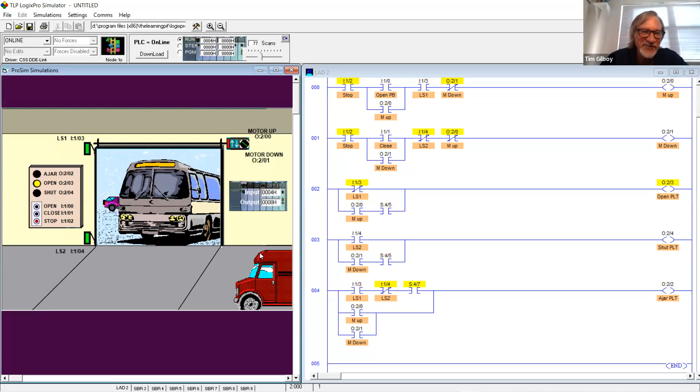All right, good. The next step is when we're closing, watch what's going to happen. I'm going to hit open. When you hit open, if it's closing, it should stop. But I'm locked out. You see that? It's not letting me do anything. Everybody see that? Yep. Okay. Because we've interlocked them. You can't do anything because I've interlocked them here, which is still the way you want to go. You don't want to do it any other way.

I'm going to go out of the run mode here and get back to programming. The next step is for you guys to go ahead and when this is opening or when it's closing, it doesn't matter which direction. If it's opening, when you hit the close button once, the thing stops and does not move forward again. Then when you hit close a second time, it starts to close. Or if you hit open, it'll open.

So the first signal is opposite of what you're doing. So if you're opening, you hit close, the door should stop. Then you can either open or close from there. Or if you're closing, you hit open, the door should stop, and then it doesn't matter which direction you want to go. All that does is stop the door so you can go in another direction if you want.

How would you think you would do this? Somebody give me an idea of how to do this. It's going to be our opposite. Instead of examine if closed, you're going to use an examine if open. Kind of opposite logic. Somewhat, but what are we going to do? Let's just say I'm opening. Okay. I hit the close button. How would I put that in the program?

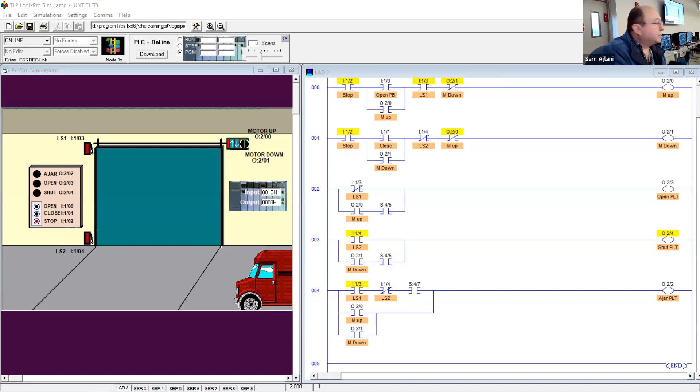Are you showing that on the screen? What are you sharing? You see it right now? Right now what you're sharing, Sam, is... Okay, it's not letting me do that. That's the problem with this. I can't share my desktop. I can only share a piece. So let me stop sharing here. And I will share that and see if I can figure it out here. Let me try this.

Okay, all right. So right now here, it says utilization of binary or integer table bits to flag a condition. That's how I want you to do this program. This is what I tell my students. I do not allow them to use OTs in this one. I use those somewhere else, but because they're very complicated to use in bit logic and can get you very, very messed up if you're not careful with them.

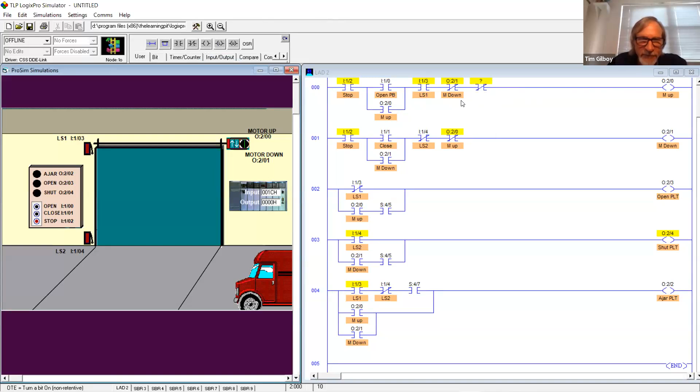So we're going to utilize the binary bits, B3s. We're going to flag conditions because I'm going to show you what's going to happen here if you don't do it. Let's just assume that I'm going to put something in here to stop this line. What would I use to stop this line in here? Well, if I'm going closed, open, and I want to stop this, I would put the closed bit in here, right? Does that make sense? Okay, I'm going to put it as not as open so I can run this until I'm ready to hit the close button, right?

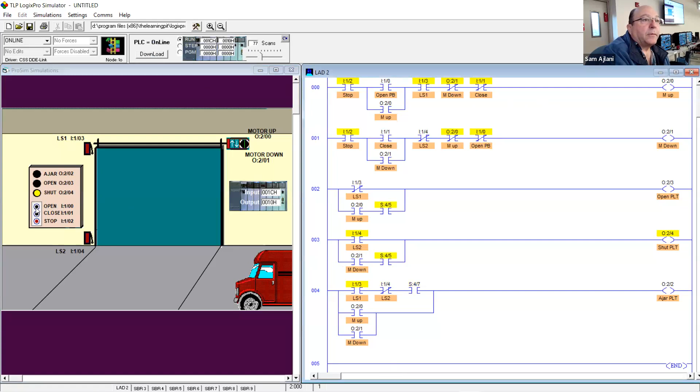Same on the one down here. I would want to try this and put the open button down here. It's open PB down here. And I'm thinking when I go through this, it's going to stop it. Students will do this all the time. And it's not going to work right. I'm going to show you. I'm going to open. Speed it up just a hair. Now I hit the closed. What happened?

What happened when I hit closed? It just reversed it. It didn't stop and halt like it said. Because when I hit close here, I'm also hitting closed here. When I hit close, since it knocked this out, this line is now active and it immediately jumps going down the other way. So you cannot use these two bits to do this. You have to flag the conditions. That's what your binaries are for. They're outputs so you can run internal relays.

Oh, come on. Or you can set up a flag condition to flag something. So what I'm going to do is, and it's been a while since I've done this one, I'm going to flip over and I'm going to say, if I am moving in the up position, which is this one, right? Everybody got it? And I hit the close button. Where's my close? I'm going to trigger a bit.

And if I open my data table up here, remember the little tools are your data tables. And I will go to the binary. I'll just grab the very first bit. They can be outputs and inputs. So this is now a flag condition where I'm saying I'm moving up and I want to close and go down. So what I'm going to do is I'm going to latch that on.

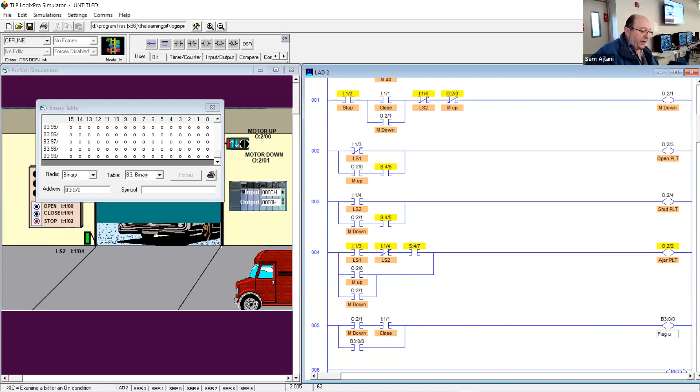I don't generally put a lot of information on this, but just so you guys know, this would be like flag up. I'm moving up. And I don't normally do it this way. What I usually do, which we're going to do next here in a few minutes, is rung comments, which is what I'm going to show you I do with my students in the next little exercise we're going to do before we get out of here.

And this is flagging that I am moving up. Wrong one. Damn it. All right, let me get this one up here. Right here. It's supposed to be moving up and I hit the close button. I've locked this bit on. Okay.

Now what I can do is I can bring this bit right here and lock it in right over here. And say if that bit is not on, I'm continuing to move. But if it comes on, I'm going to halt this puppy. Everybody see that? Is that the first bit we put in here? We didn't do that last time, did we? Did we use flag data yet last time?

We did in something else. Actually, see, remember we did a control relay, and instead of wiring a control relay, we just made a B3 to do that with. Yeah, that was, yes. Where was that? That was back in the first class we were in. Very first class we were in. We didn't use it this last lecture thing we did online. And in the class, we did that. What the B3s are, they're internal relays, so you don't have to go out and wire another relay.

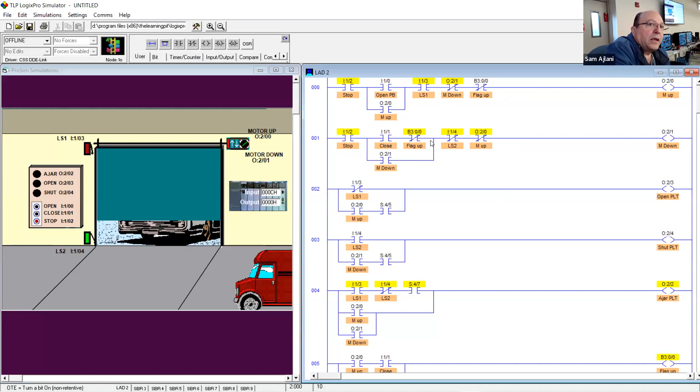I can put it here. I could put it down here. I mean, when I hit close, I don't want it to go. I can do it here so it blocks it. But even if I hit close, it's going to start to jump down. I don't want this to come on at all. So I can put it in here. I could put it somewhere else, but this is the point where I usually put them if I'm going to do them. Now let me download that and let's try it again.

Oh, I got the flag on. Sorry, hang on. I got to get in there and clear the flag. I didn't clear the flag when I was in there earlier. So let me drop down here. You can see it. All right. Now I'm back to normal. Let me open. What did you just do? What do you mean by clear the flag? I just made it when I locked it in a minute ago. This is still locked in. I have not reset this yet.

Okay, got it. So what I did is I just got this triggered going in, and now you notice that when I hit close, it stopped the opening. Everybody see that? Kind of hard to see because this thing is really hard to see through. But what I did was I flagged that condition. How I flagged that condition was I said, if the motor's going up and I hit the close button, I'm locking this flag in. Knowing that I'm going up, I'm going to stop the upside. And how I did that was I blocked it here. But I don't want to go back closed again, so I got to block it here as well, right?

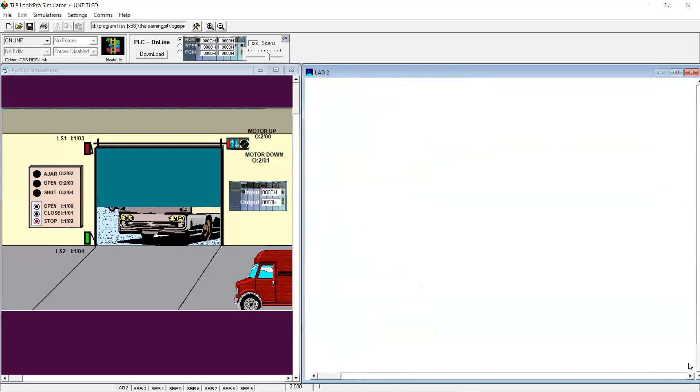Now you were saying that could go anywhere. So just because that's going to read that, it's not going to matter because it's not going to have happened. So you could put it as the last input, right? And it still work. Probably. I do it inside here. Why? Simpler reason I do it inside here is I don't want the close button having anything to do. So it's all about the close button. Gotcha. Just for simplicity for the students, I kind of do it there. But yeah, you could put it next to the stop or out between the LS2.

Yours is better. Yours is using logic. They're together. So that's good. Same thing. Right. So I know that that's going to happen. I got it. Now the issue is I got to go the other direction. How the heck am I going to get that unblocked?

You got to flag another condition. Yeah, you could force it, but well, no, remember, I got to hit close again in order to move it down, right? Yeah, so I can create a second flag condition. When we're talking about flag conditions, we're flagging a situation in the process. We were motioning up, right? Yep. And what we did was we said, I want to flag that I'm moving up, and I hit that close, and then I blocked everything from happening with that flag.

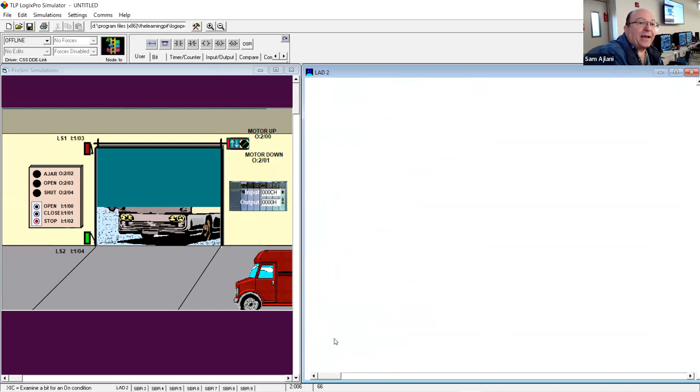So what's my new condition now? Want to move down. Okay. And so you got to find when this is on, right? When I am in this flag condition, right? That means my flag up is on. Yep. And I hit close again.

Now you got to be careful with this because you're going to have to do some real manipulation. This may not work because now I'm going to clear it immediately when I hit close. So the first time I hit close, it's going to lock it down. But if I'm in this condition and I'm still pressing that close, it's going to flip on you, right? So can I really do it that way? Yeah, you could do it that way, but I don't think it's dependable.

Why? Well, I was thinking about the way this program is being processed. It depends on it stepping through. So therefore, depending on where the program is processing, I think it could make it confusing. It is confusing. This is a hard concept for students to pick up. Yeah, me too. Exactly. That's why I like the simulation software. It gives you these scenarios. One of the key things about this particular program you want the students to get out is interlocking with the motors, right? And learning how to use the flags. That's the key behind this program. All right.

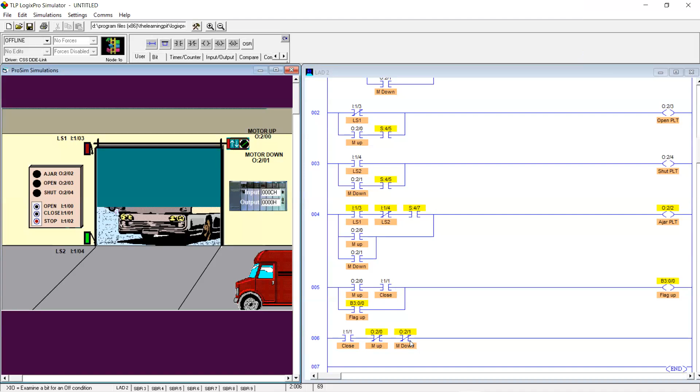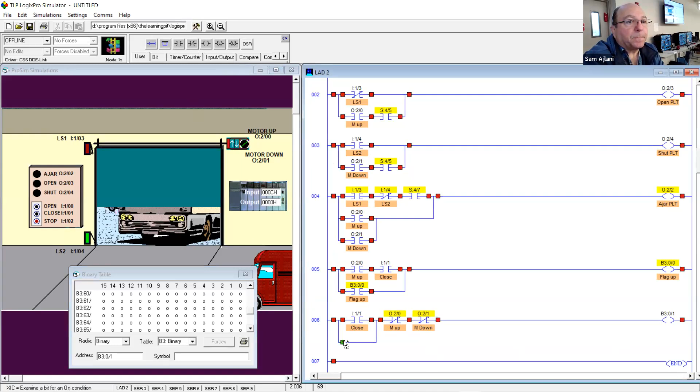Okay. This is my other condition. The first one I was in motion. I hit close. Guess what happened? Got it. All right. Now I'm moving this way, right? Yeah. And I hit close and I don't have anything going on. What can I do? I can put another bit on, right? Flag that condition. Oh, where in the heck am I here? Okay. All of this happening. And I don't really necessarily need this inside a loop, but this one could be in the loop. Right? Now I can break this one once that one's done.

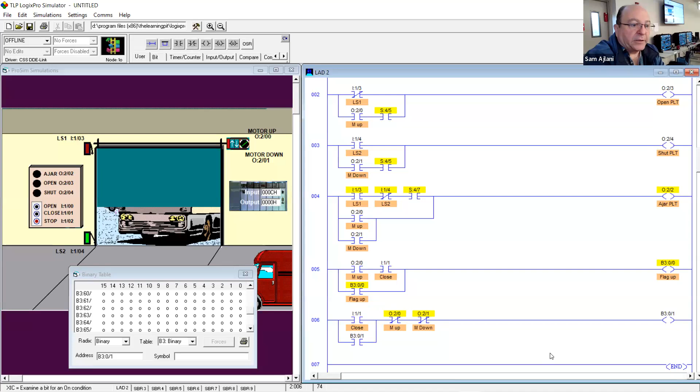Oops. Somebody else coming in, or did somebody get knocked out? Might be coming back in. Oh, okay. Poor thing. She's having trouble, isn't she? I came to campus because my internet at the house is terrible. What I'm trying to do is put you on one computer so that I can follow on my own software while I can listen to you over here. Oh, I got it. I don't know if that's gonna work. Well, wait a minute. You can run them both at once. Start the other one and use Alt Tab to go between the windows. That is true, but she wants to see it live while she's programming it. Okay. Yes, and our screen is small. Yeah, that's a double monitor. That's my problem.

Right. So I flagged this condition. I don't know if this will work or not yet, but we could play with this. What I can do is I can break this one so I can go down now, right?

You think it'll work, or do we need to do something else? Let's try it. All right, we're gonna try it. I like Sam's method here. That's what I try to get my students to do. Just try it. Play with it, work with it. It's how you learn.

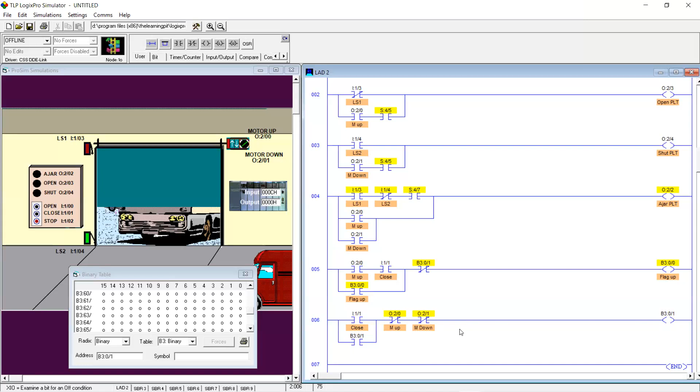Okay. This is just the closed portion here, okay? Right now, you chose another bit, right? The other one was 0 bit. B3-1. I flagged the new condition. Yeah, good. I see it. It is different. It's probably not going to work because there's a couple more things we got to do, but I'm going to download and get rid of this.

Now I'm going to go ahead and open again. Oh, I got to clear that bit. Sorry. I hit close. It should clear it, I think, if I did it right. Yep. It's closed. Everything is off. I should be good. Okay. Let me put it in run then. Okay. Let's open.

Oh, is the bit still locked on? It sure is. Let me clear the bit. Sorry about that. Keep forgetting. I should have a clear bit symbol in there, but I didn't do it. When you get off, whatever was on there last is going to be downloaded with these bits. So sometimes I'll put a push button in there to clear bits. And we can show you how to do that later. But right now I'm going to open.

It closed. What happened? Went straight to close. Right, because it looped, right? Interesting, huh? So when I close and I'm holding this button down, I am now what? In this mode, right? But I'm also holding the button down here. So what if I hit this close? This is going to be maintained.

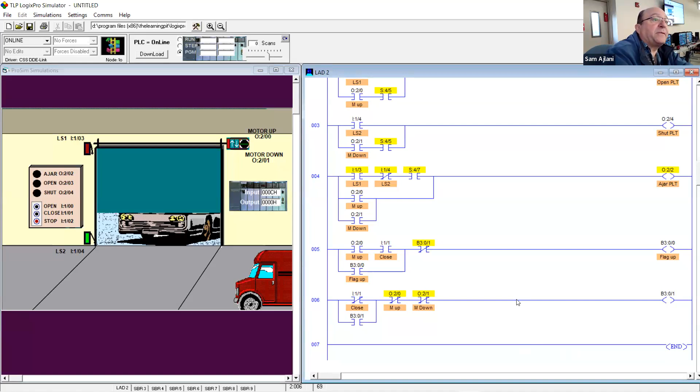That make any sense to anybody? Yeah, a little bit. All right, let's try it and see if it works. There's more to this, but so let's open. Close. Now I'm going to hit close. Everybody see that? Everybody understand what happened there? Watch here. Close. Right, it stopped, and then when I hit close, it closed, right? Because when I push the button in, I'm locking this on, which is going to block up there, right? Y'all saw that, right?

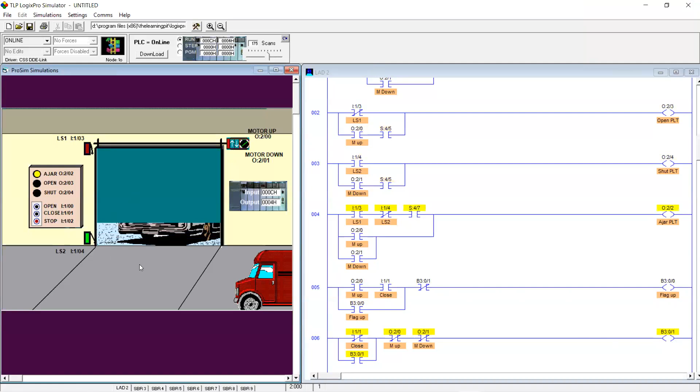When I release the close, guess what's going to happen? Bit 3. And that's going to stop this. So the second time I hit the close, guess what's going to happen? Watch one more time. I hit close, I hit this, which stopped up there. When I released it, this came on and cleared this bit. Now, if I hit close the second time, I'm ready to go again if I want to.

I set up 2 flag conditions. Flag 1 is if I'm moving and I hit the other button, I'm flagging it. And that's going to block what? Whatever direction I'm going. So it's not necessarily flag up. I just put flag up so you can see where we're going. The second one is reset the flag. So I don't need any more bits because, depending on which condition I'm in, moving up or moving down, I can use these 2 to do everything.

All I did was I closed, this became active, this came on. The minute I release this and everything is stopped, this went on and cleared it so I could go down. This is the difficulty of logic and logic gates. This is where students get bogged down right here. Yeah, totally agree.

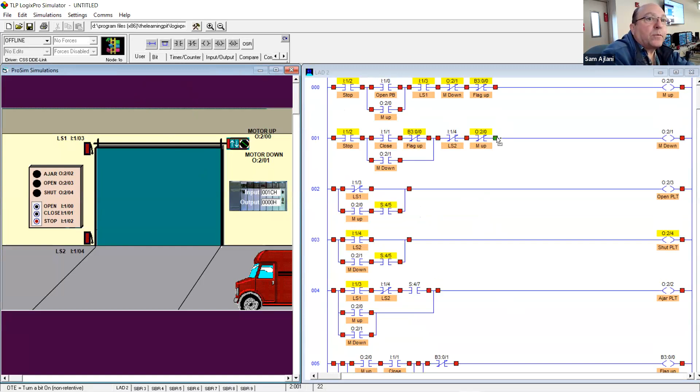It'll still work the same way, and I have to go up top here like I did with the other one. See how I flag the condition here? I got to put the same flag here, and I got to put the same flag here. And that will solve the problem for you. Except I'm going to change the name of it. I'm just going to call it flag motion or whatever. Or you call it motion flag, whatever you want to do.

And then this one I would just call reset. That way I can reset that motion. So reset motion flag.

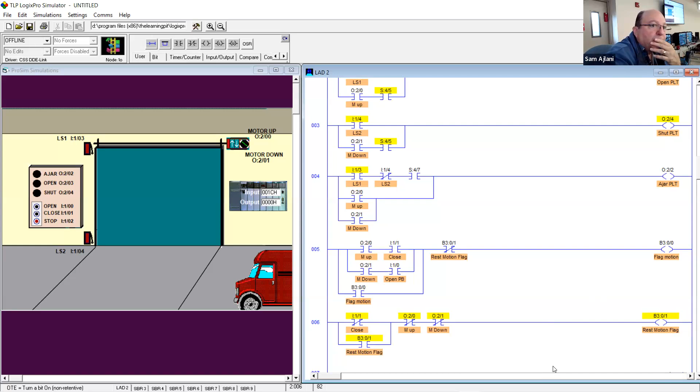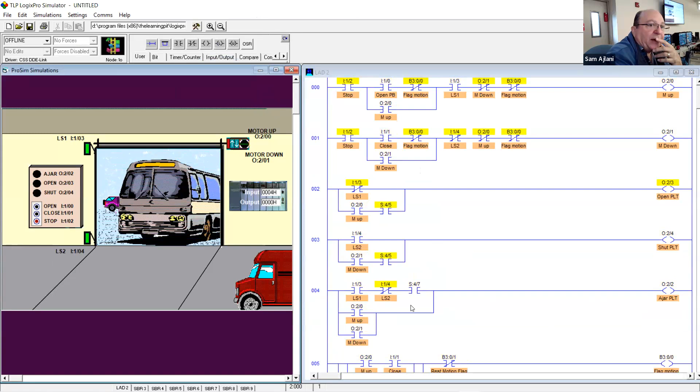Let's try it. Let's play with it a little bit. All right, I'm going to open. Things not moving as fast as I'd like. I think my computer's... it closed. It closed. Now I'm going to hit open. What happened? What did I not do? All right, do it again. Now I didn't reset it because I failed to put my open button down here.

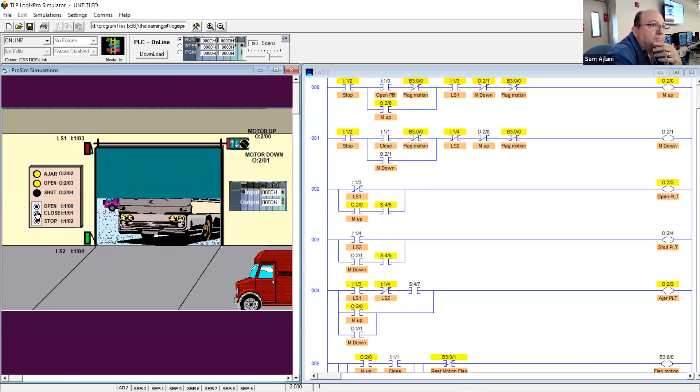This is the two hardest things in this whole project. But it's critical that your students understand how bit logic works. This is very important on flagging conditions. These two lines control that door pretty heavily. All it's controlling is, am I in motion or am I not in motion?

Think about it. If I'm running and I hit one or the other, I'm locking this flag on. As long as I'm holding that button down, it's locked on. The minute I release, now I'm ready to go back the other way. I clear this, so the second time I hit it, it will allow me to move in the correct direction. Very difficult concepts to understand.

Believe me, when I first started programming, of course, I was on the old handheld teach pendant thing where you only get to see one line at a time. You had to write all your programs out. What a nightmare that was. Then when they moved to DOS, I thought I was king of the world because in the DOS version, I could see more rungs. And then now they got into Windows, it's really good.

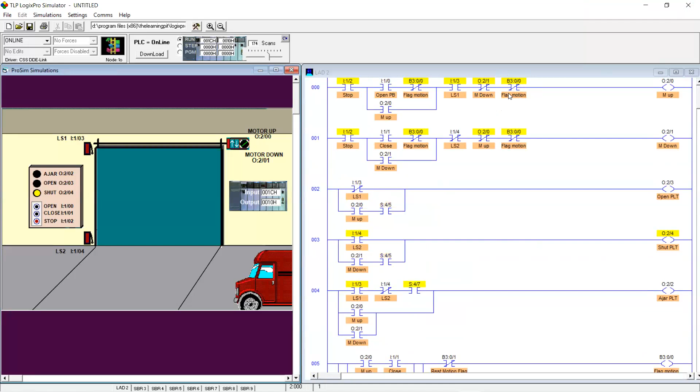This bit is locked on. B3:0/0, okay. Do you see that? Yes. Yep. Right here, it's going to stop that motion. Okay. See it right up over here? Yep. The minute I release that, what comes on?

Okay. And that's what's going to reset this. If this is on, this cannot be on. Okay. So now I'm ready to go in either direction because I'm back to this situation where this is no longer blocking anything. But I'm not pushing it to engage it, right? Right. Okay. Now I push it the second time.

This will go off, but it has no impact. The only thing this impacts is this, because now these are back on. So if I push open or close, it's going to go in either direction because this is no longer engaged here or here. Okay. I don't know if I necessarily need this here. I mean, I can take this out technically. It should work the same way, right?

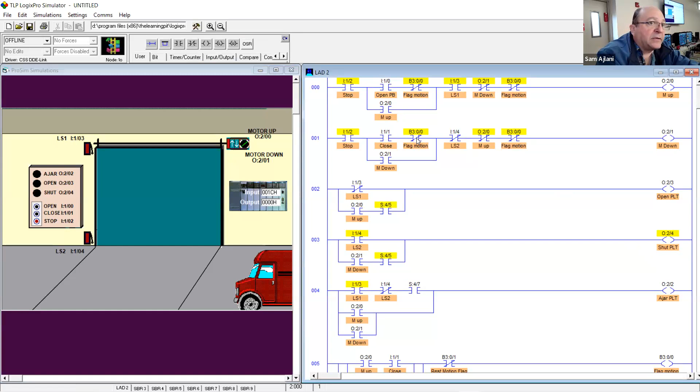I do this sometimes because I'll do it here so they can't push the button, but I need to stop the line. So I don't really care about this one too much. Let me download it and show you that it still probably will work without it. Okay. So that was just kind of obsolete. I threw it in there just to show you that I'm trying to block the signal, but this is what's blocking you from moving right here.

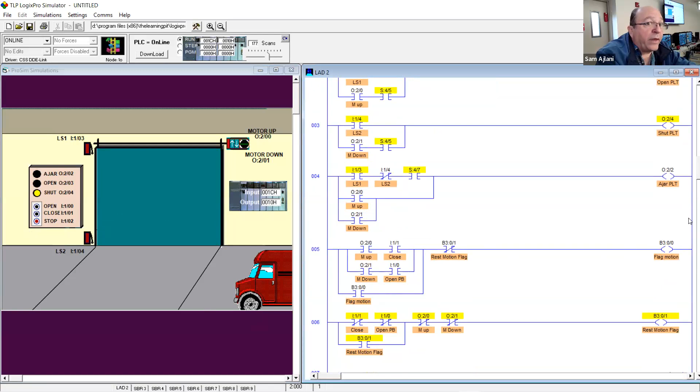Got it. Yeah. And so all I'm doing is I'm flagging a condition. I am moving down and I hit the open button and that's going to stop. Because if I just use the open button up there without any flags, and this is not here, the minute I'm closing and I hit open, it's going to immediately jump up. It's not going to allow us to stop it. It's just going to go down and start moving right back up. I don't get that stop motion. So I have to flag that condition to stop it.

It takes students a while to get through this one. And the last one, as I said earlier, before the rest of you guys came in, me and Sam were talking. I told him, Sam, I only ask for exercise 4. I don't have time to grade each individual one. And the reason I don't ask for the others, well, what if they're doing something wrong? If they can't get it, they're going to come to me on exercise 1, 2, or 3 and say, hey, I can't figure this out. Then I'll sit down with each one of them and work with them.

But most of them, the first 3 are pretty basic and they should be able to get it to work. And in my lecture, if they say, hey, I wasn't able to get this, then I'll go over it and show them how to move up, lock it on, interlock it, whatever. The flag, I make them play with it until they just get so frustrated they can't figure it out. And then I say, okay, it's due today, and none of you've turned it in because you can't figure this out. So let's talk about this. I'll get them started on it before the end of the class. I don't do it for them. They have to do it. Once they see it, they got it.

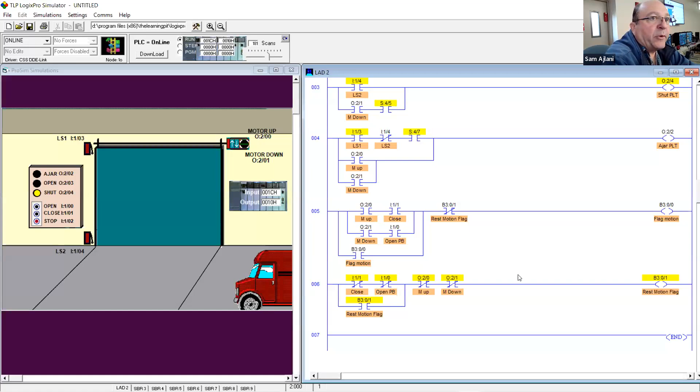Start, stop a motor, and then turn a light on when the motor's running, go red when the motor's running, and green. I'm doing all kinds of stuff like that through a PLC, and they're gonna get freaked out because they've been in motor controls wiring all these hairy start, stops, taking them 30, 40 minutes to wire one, and they can program it in a matter of minutes and wire it up. That's when they start throwing rocks at me. Why didn't you show me this before? I told them that's going to happen, but we have to know how we got here.

So this is about week 6, 7, somewhere around there. Maybe I have to go back and look at my course. Do you have a prerequisite for your PLC one then? No, I have a co-requisite. They have to have taken or be taking motor controls with PLC. I prefer they do both because here's the reason why. They're young. They have not been exposed to relay ladder logic. And if I get an old man in here like me who grew up with relay ladder logic, it's near impossible to get them over to PLC ladder logic.

They're thinking these symbols are normally open, normally closed, and that shouldn't be working like that. I should have a normally closed, examine if open as my stop. No, that's not true. And I had one guy who worked for General Motors say, that's how we program those. I said, I guarantee you it is not. That's illegal. If OSHA found out they're gonna shut that plant down. And he's going, no way. I said, go look at the program. Have one of your techs open it up and show you how you did it. It took me almost 2 semesters to get that guy to realize I was right. He just could not get it because he's old school relay.

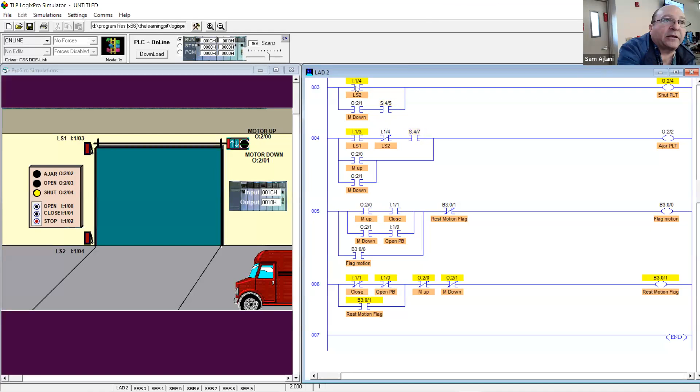And that was my frustration. I just think backwards now, it's literally when you're looking at the contactor. For guys like me and you, and probably Sam, I imagine he's the same way. Yeah, I am. Because we're all relay guys. We grew up with relay. PLC came on board while we were working. The problem is we have to go opposite. Just think it's opposite of what relay is. Exactly. So look at these symbols as in the normal condition. What condition is the examine if closed here? That's in the normally open position. All this is saying is it's open and I'm waiting for it to close. Examine. I drive home the examine.

But I still have people like Automation Direct that call it a normally open contact. I'm saying that's not right. Nobody else does. I said, you guys are way off base here, because they're old school relay guys. Totally agree. I had to change. I finally switched to the right vocabulary. That was my frustration at the time, exactly that. I finally got my brain to go, okay, learn this logic. This is logic. Well, I catch myself periodically saying the same thing. Say that one more time.

Something else that's confusing about this is I use Amatrol's equipment to teach this course, and Amatrol has the EC90, which has a PLC on it. They also have the same portable unit without the PLC. Okay, the one without the PLC, you teach it purely from the relay standpoint. Yes. Then you got to go and take the same board and teach it from the PLC standpoint. And yeah, I see yours over there in the corner, right? Right. You got to teach it from the PLC standpoint.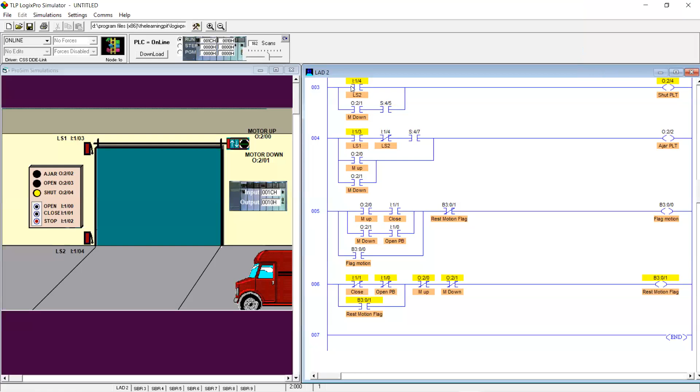So now you got to get them looking at the relay logic and saying, like that open relay right there, that's an XIC. Exactly. So if XIC, give me a 1 here. Right. So what I do is I have the 990 EC1 portable, strictly relay logic. And I bought extra banana clips and cut one end off to tie into a PLC, and I make them run it through the PLC. Oh, okay. I said, now program this with the PLC. And then they have to go back and see the difference.

Right. That's what I'm thinking of doing, is let them set it up on those 990s and then get a PLC with leads and banana clips, like you're saying, and plug into it to test those switches and run it from a PLC standpoint. Absolutely. And if you have a board like I do, these panels I got in here I bought from Grainger. You can get them from Grainger.

I make them wire the motor control circuits up, but then I make them go back and wire the PLC into the drive or into the motor starter. And I make them wire the overload back to the PLC, and they have to set that program up and build it and make it work just as if they had wired it using relay ladder. My second level PLC, there's no wiring of anything except the outputs. My inputs now are from the HMI. So it's all internal between the HMI. So my inputs are all B3s or B10s.

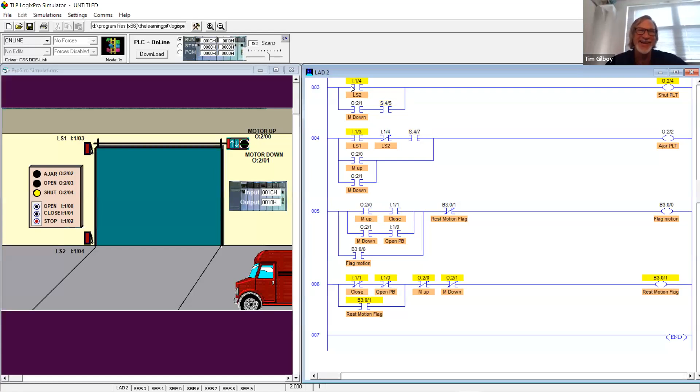I'm not an interior decorator, but I told them there are some good color code options. I give them to them from somewhere, because I have no business matching colors. But I see some really incredible screens come from those students. Some of them are pretty creative.

I can imagine. What you can do is take a bitmap, just take a picture of the panel they've been working on. If you switch from a panel to an HMI, take a picture of the panel, convert it to a bitmap, and it'll go into the background. Then you send your buttons to the back of that, and there's the button they were playing with on the screen. Because an operator does not know why he touches a button. He just has a pattern of things he does. So if you change that completely, he has no idea what the new pattern is. It takes him forever to learn.

So to eliminate that learning curve, you just take a picture of his panel that he's been working on for 20 years. You stick it on that HMI, and he follows that same pattern, and it works. Okay, that makes sense. Those are things they have to learn about converting from panel to there.

And for people who have some ADA issues, they got to be able to see that stuff. So if they're having a problem, they need to know right away. So I just make my stuff compliant from the beginning. Not that we're trying to be ADA compliant or anything, but since we work with students and we know how bad they can be sometimes, you got to do the same thing there. It's got to be visual, not necessarily sound wise, because it's very noisy in most plants, but visually it has to be there, flashing stuff and things.

So you're covering hearing impaired, and then verbiage has to pop up on the screen for your people who are deaf. So you got a lot of things you got to cover on those. So it's not just about building a simple screen to go. It's about how you build that screen. Second thing is they got to learn how to do multiple screens, because you want one for the operator, one for the supervisor that is coded. Nobody can get in but the supervisor. I'm talking like the production supervisor, so they can watch their shifts.

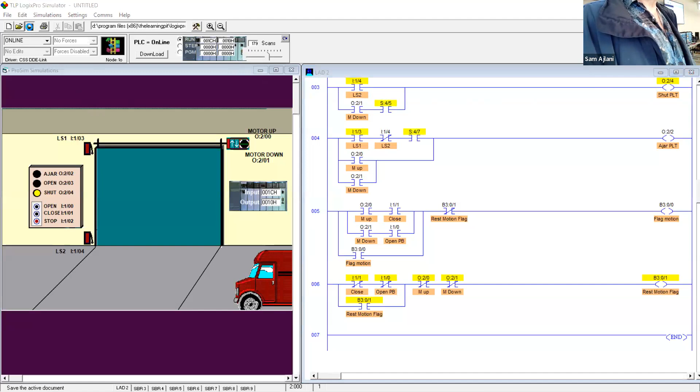So what I want to do is I want to stop here. I want to start a new screen. Save this too. If you haven't saved it, just save it. What I did was I did door project FLATE, but you could do just door project. And this was the original one we did. But I just went ahead and recopied it there, and then I just save it back as that. And then what you can do is create a solutions folder for all these things. So you have them here and you can go back and look and see. Oops, I'm in program mode.

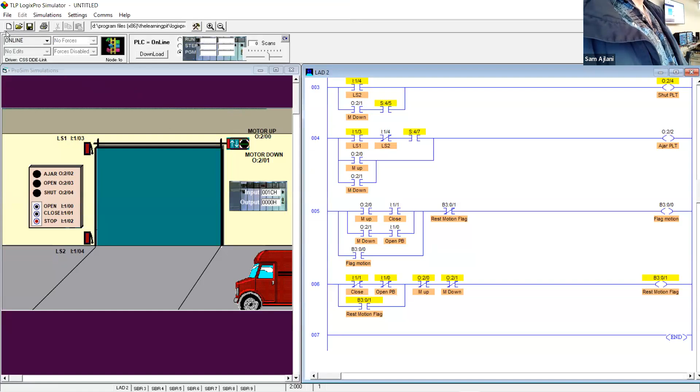So I'm going to tell you now. Can you send, you did something last time. I don't know what you did. If you posted it in our chat, I can't remember. I think you did it in chat. I did it in chat just a few minutes ago. If you go into the chat, you'll see it in there, the original one that we started with. Yeah, I had that one from last time. Yeah, and then that's the one I did. If you want me to send mine, I'll send you mine too. Yeah, of course I want your answers.

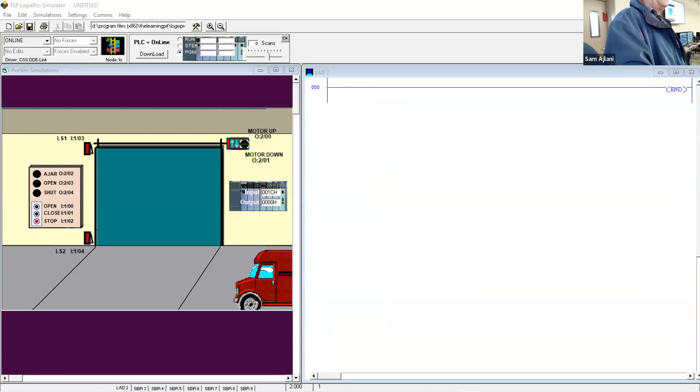Oh my God. You got your own answer. You completed this? No, I didn't. There's no way I could do both at the same time. Yeah, we're too busy. I gave up. My current one has like two things in it, and then I quit. All right, I just sent it to you. The second one is completed. It has more kilobytes. Thank you.

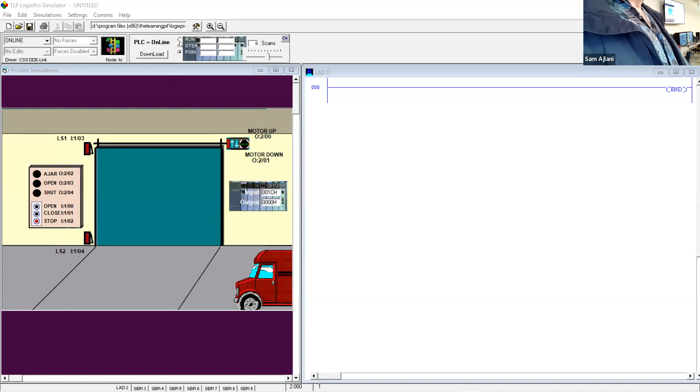I gotta play. The only way to learn this, just like when you teach this, is they gotta spend hours playing with this. You can't watch.

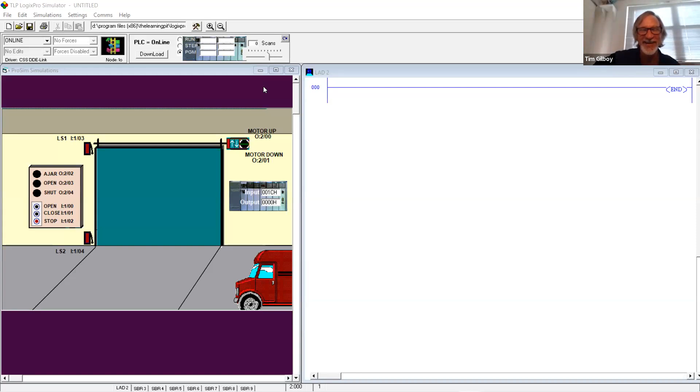This is why I Zoom every lecture I do, because I'm going over this stuff and I'm showing them how to do basic things. They go home and then they open that recording up and they go do it 20 times, and they stop it until they get it done and then they continue. That's the way you have to do it. That's why Teresa's got us recording this, because we talked about this. She's got recordings out there, so you can watch it 20 times until you get it. That's the whole purpose behind this.

All right. I opened a new one. It'll jump over what you had. You won't have a thing there. I want to change simulations to Silo Simulator. I know we're getting close to running out of time, but I'm going to go on as long as we need to, because we've got to get this one. This is the second thing they need to understand. This is a whole different animal, guys. This is completely different from anything you've ever seen. So this is how I'm going to show you how I teach them.

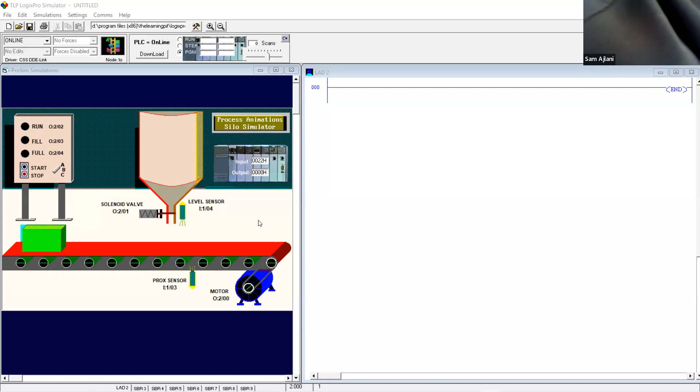Are you going to tag something? Remember, outputs can become inputs. So our 5 outputs are going to become inputs. Yeah, it's not tagging, but literally you have 12 inputs you can play with. Sally already knows all this. So you're saying the 7 we know, and then our 5 outputs make it 12 options. Yeah, you've got 12 inputs you can play with. So I have 12 inputs and I only have 5 outputs, because inputs cannot become outputs. Got it. Think about that. Outputs can become inputs. That's the trick. That is the entire trick on this one.

Okay. Now let me go back to the screen again, because I want to show you exactly what I do with them on this one. This one's a little more complicated because they need to understand process. We're going to switch them over to how to do a process. So we're in a mode. So when I hit start, the conveyor should be running. So I'm going to come up here like this. Process flow is what we need to be looking at. So I have an input here that's a start. I can't write with a mouse. It's like writing with a brick. So here's my start. And I also have a stop, right?

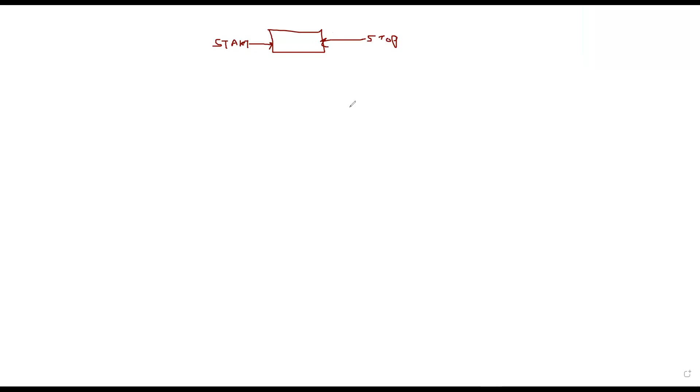When I hit my start, what am I going to turn on? The conveyor belt. Everybody agree with that? Yeah. Well, I don't. I completely disagree with that. Let me go look at the picture. Where's our process at?

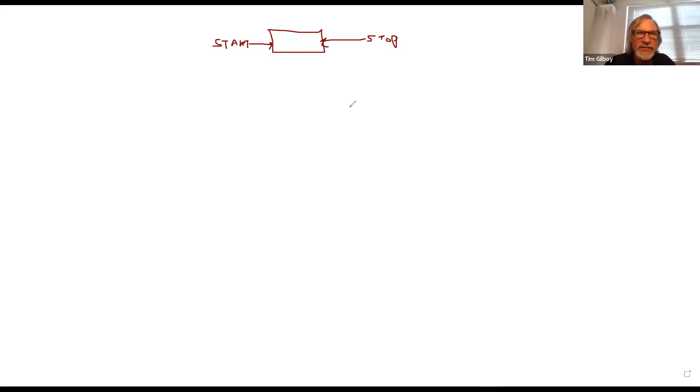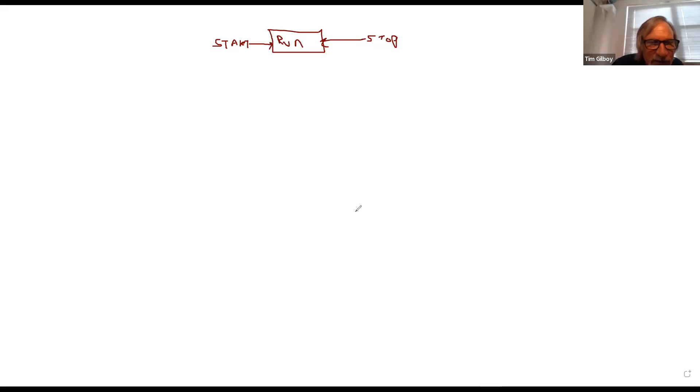What I do is when I hit the start, I put it in run mode. How do I know I'm in run mode on your diagram, on the software? What tells me I'm in run mode? I can't find the panel. Okay, the LED. The run light. Right, I'm in run mode. This is run mode. Then that turns on my conveyor.

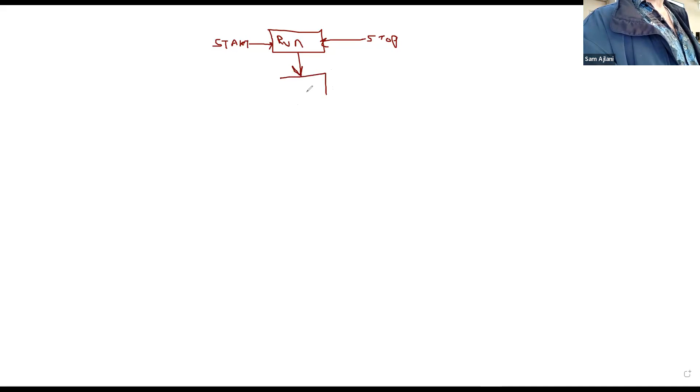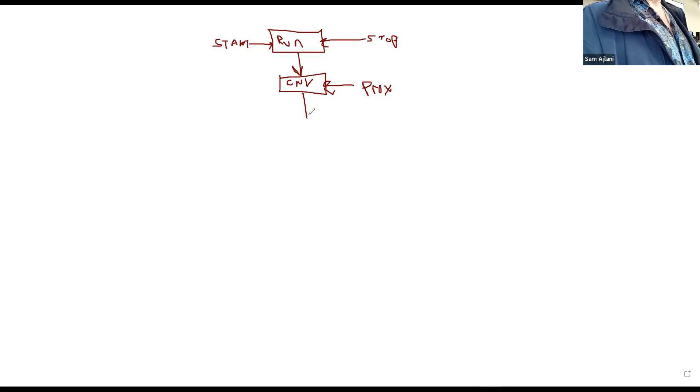Run is the input for the conveyor. Another input for that conveyor is my prox switch, right? Okay. Yes, I finally have the picture, so I finally can help you. Prox switch is going to stop the conveyor. When that conveyor stops, I am now in fill mode. What indicates I'm in fill mode?

Well, I guess the solenoid output one is... Oh, no, look on your panel. You're looking at an operator. You can't see a solenoid out. Oh, my bad. Say it again. How do I know I'm in fill mode? Because it's lit up. Right, fill light's lit up. And my input to that one is my level sensor, right? Yeah.

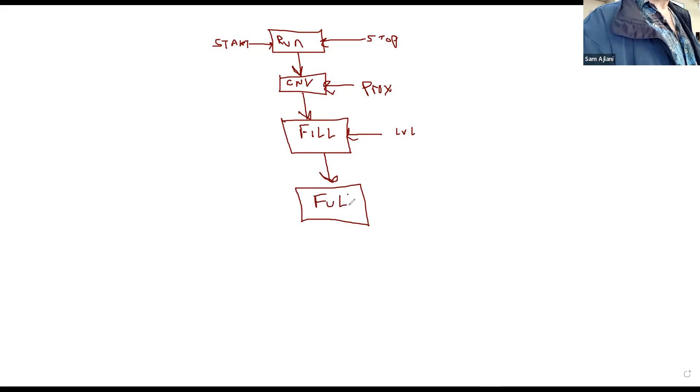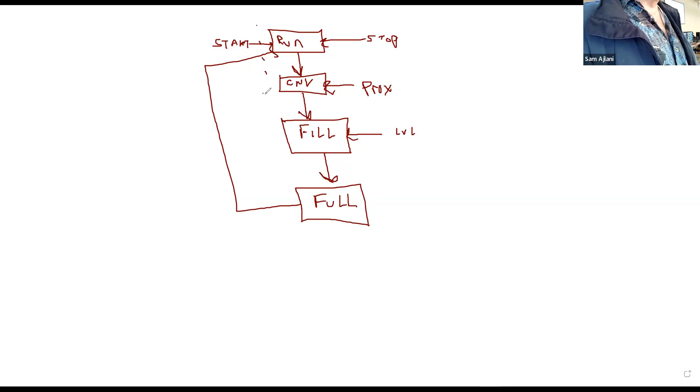Once I hit that, I'm now in what mode? When the level's up, you'll be in full mode. Yep, full mode. Once I'm in full mode, I got to restart the conveyor. This is the beginning part of it. I have three modes: run mode, fill mode, and full mode. So these two kind of run together because in run mode, I'm going to have my conveyor in there. Got it.

So how am I going to program that? I'm going to share screen back to my LogixPro. Now that you understand that little bit, how am I going to put it in run mode? I have a stop and a start, so I'm going to put a stop start circuit in here, our classic motor stop start. This thing's not working too well on my end. And then I'm going to drag this over here.

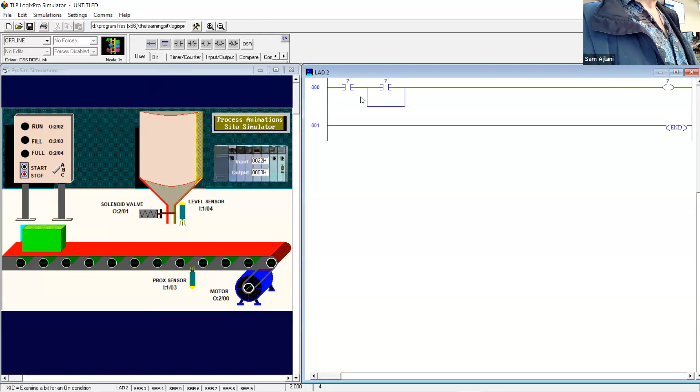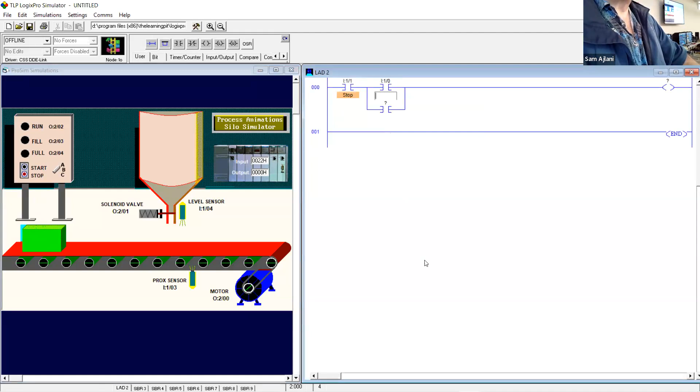This is a typical stop start. So here's my stop. I'm going to drag that up there, right click on it, edit symbol, call it stop. Then I'm going to drag the start symbol over, or the address, sorry. It's actually on the word, not the button, in this case. They weren't very consistent with that part of it.

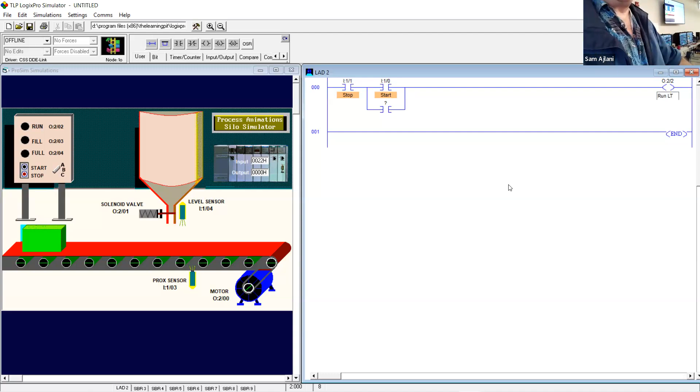And now I'm going to go into run mode, so I'm going to use the run light. I put PLT on mine, but the new wave is just LT for the new students. They don't know what P means because they don't use the word pilot anymore in a lot of this stuff. So I turn that on. I've got that locked on.

In order to understand this and understand I am in run mode, I now teach them rung comments. On your bit comments, I do a lot of abbreviation because you don't have a lot of space on those bits to write. 5,000 is a little better. But in a rung comment, you can write a novel. I could say hitting the start button brings this process into run mode, and run mode will control the conveyor. But for them, I said, make it simple until you get used to writing. This is where you explain how this rung works and the rungs below it if you need to.

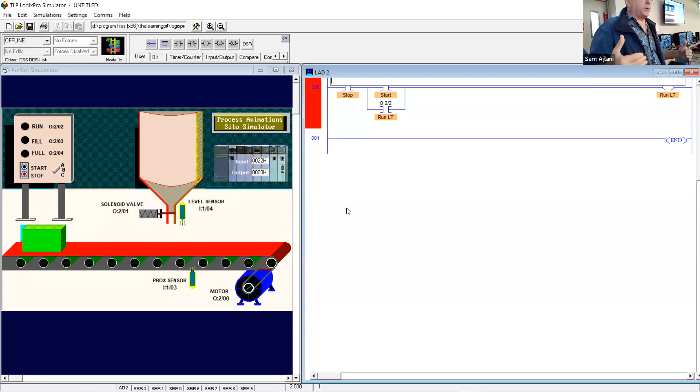And everything after they do this project has to have rung comments. If they don't, I dock them. Now that I have the run light on, I can start my conveyor, and that is this motor here. I don't put motor because this is a conveyor motor, so I'm just going to write CNV for conveyor. I abbreviate on bits because you don't have a lot of space to write on those. In 500 you don't; 5,000 is a little better.

I'm still in run mode. So what they want you to do is to run over here, stop under here, fill the box up and then move on, just a continuous operation. Okay.

The sequence can be stopped and restarted at any time using the panel mounted stop start switch. That's what we just did. Run will remain energized as long as the system is operating automatically. Run light, conveyor motor, and solenoid will de-energize whenever the system is halted via the stop switch. Fill light will be energized while the box is filling, and full light when the box is full, and will remain that way until the box has moved clear of the prox sensor.

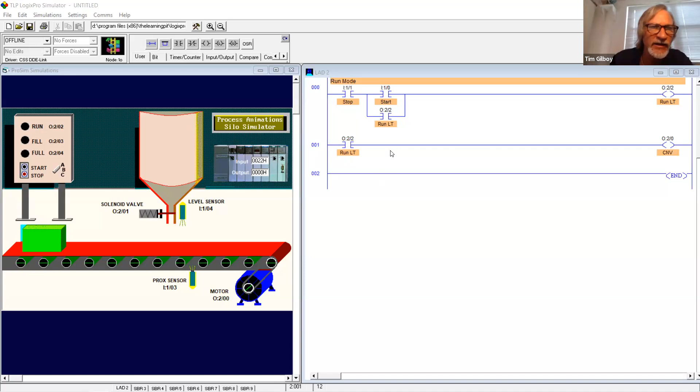All right. Where were you reading that from, Sam? I pulled up the exercises. I can't show you both because of the way I'm set up in this. Okay, but I should be able to access it, right? Exercises? Yeah, if you go to help, go to student exercise, it'll open up a web page, and then just go down to the thing. Again, on this one here, exercise 3 is the only thing I want to see from them, because that's complete. Okay.

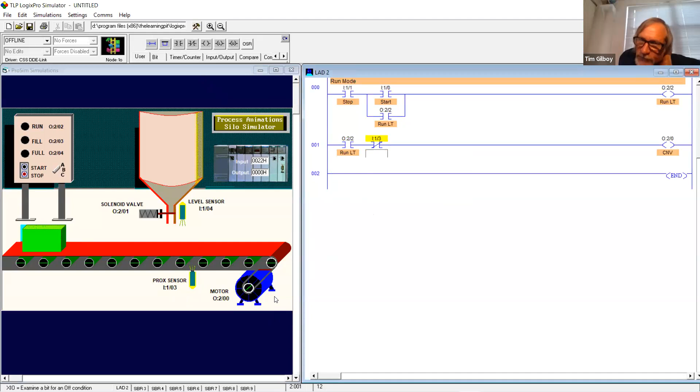Got it. All right. So now what I'm going to do is I'm just trying to get it to stop, fill, and roll again, and just start continuously filling boxes, okay? So right here, I've got the run light on. I'm going to run my conveyor. This conveyor is coming down until it hits what? Our prox sensor. So as long as that prox sensor is not activated, that conveyor will work. Got it. How do I know that? Because I've done this a few times.

But in the real world, they have to go out and see what type of sensor is this. Is it PNP or NPN? In other words, is it normally open or normally closed? We don't know till you get there. So this could be a different scenario. If it's a normally closed, then this would be on until a box hits it. And it just depends on the sensor and what they ordered or what the manufacturer brought in.

That's why when I was a maintenance manager and plant engineer, I had my technicians work side by side with the folks coming in to look at how they program it, because they need to know how the system works. And if you're not sure that this is correct, you don't even need to download, just put it in run mode. Notice the stop is on and prox is on. Do you see that? Yeah.

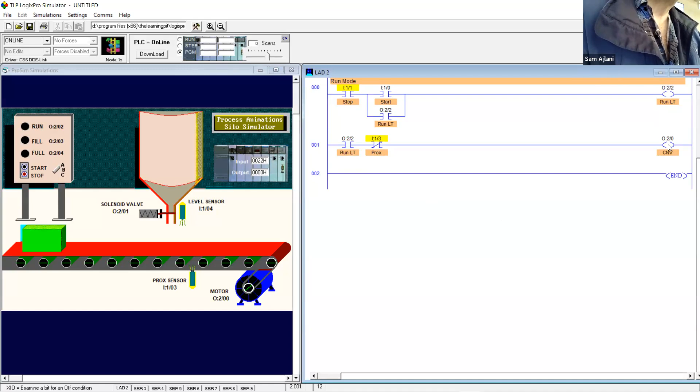All right. Now I'm going run light. It'll run until the prox is on. Now, what I'm going to say is when that prox is on, I'm going to do what Tim said. I am going to do what? You're gonna fill. Have your solenoid output. Fill, yeah. So my solenoid valve is going to open up to fill it up. And I don't know why this popped up, probably because I dragged this down here. But now I have got to add one more thing in here, and that is my run. If I'm not in run mode, this cannot work.

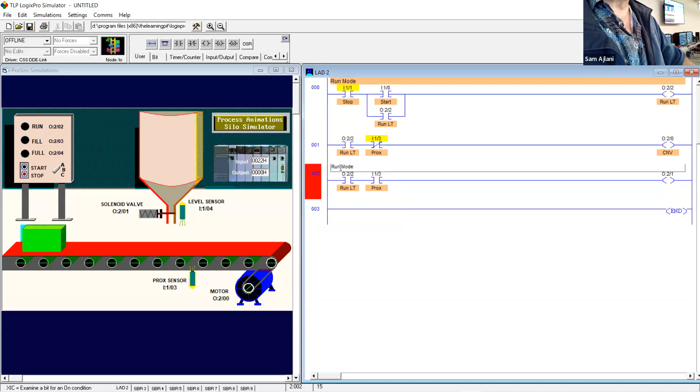Okay, yeah. So Sam and Tim, we're old school relay ladder logic guys. You remember we had the stop and then we had all these multiple lines down under the stop. We don't need to do that. We just put the run light now in front of everything. Makes it a lot simpler to look at and visualize when you do that. Yeah. So now this one is starting my what? Fill mode. I'm in fill mode now. Right.

So looking at this right offhand, everything in run mode is in between these two in run mode. Everything between this and the full mode is going to be fill. So when I'm looking at this to troubleshoot and it's not starting, I just go to run mode and figure out what's going on. I only look at these two lines. That's all I need to look at. For troubleshooting purposes, this helps a little bit. Not a lot, but a little bit. And in December, we'll show you a much better way of doing this.

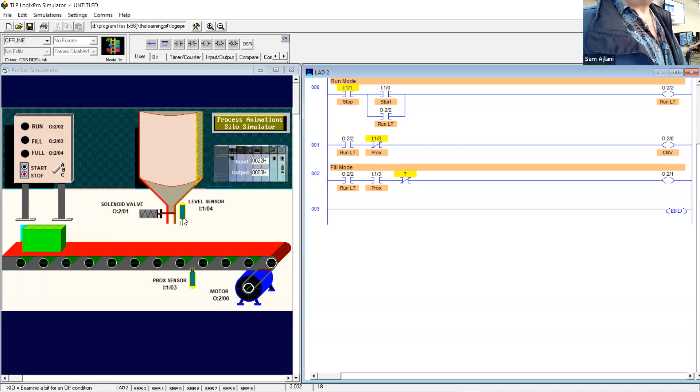So now it's done. The prox switch is on. I'm opening the valve. Not only is it locking out this, but it's also got this on until I hit what? Until the level sensor. Right. So as long as that level sensor is not on, and if I want to know what that is, I think it will mouse over and let you know. Yeah, it's normally open. Okay. Normally open. Yep. That's what we assumed.

I forgot that you can mouse over. It's been so long since I've moused over.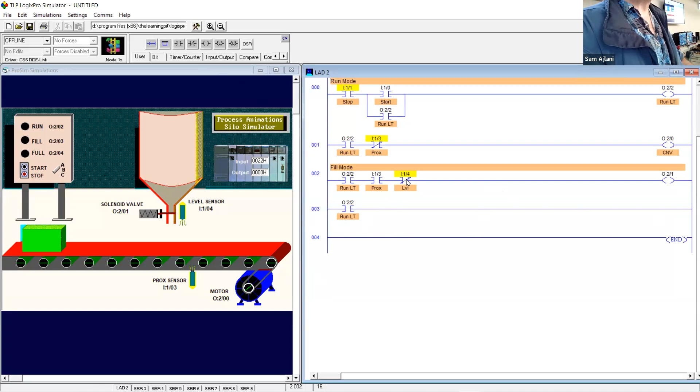So now this is going to be the level sensor. So I just put LVL just for that. That's my fill mode. And then what I'm going to put down here is run light. And the other thing I could do is just loop this with the thing, right? Yeah. I want to make this a little more efficient, but when I'm working with students who are beginning to learn this stuff, I don't force them to put a loop underneath another output, although they can, okay? I just do it like this, and then I'll go, what am I doing here? Fill is going to be this, and it is going to be, where's my prox? There it is.

Yeah, I probably should have done it that way, but it's all right. I'm still full. And I can put my run after this too, if I want to do it. I mean, you can do it any way you want to do it. Normally when I program, I'll drop a loop under here. So they'll do it this way first, then I'll show them the other direction. Yeah. Delete that. Cool. And this will be the fill light. This is the simple way to do it.

I almost put PLT. I'm so used to doing that for many years. It's hard to get off of it. So what I could have done is just made a loop under here, right? With this. Okay. Same thing, right? But sometimes they don't see that. And so they'll do it like this. And I'm okay with that. Then I'll come back and say, could we fix this to make it a little easier, simpler? And then I'll show them, they go, oh yeah, I see it now. Okay. That's the kind of thing that you're going to run into.

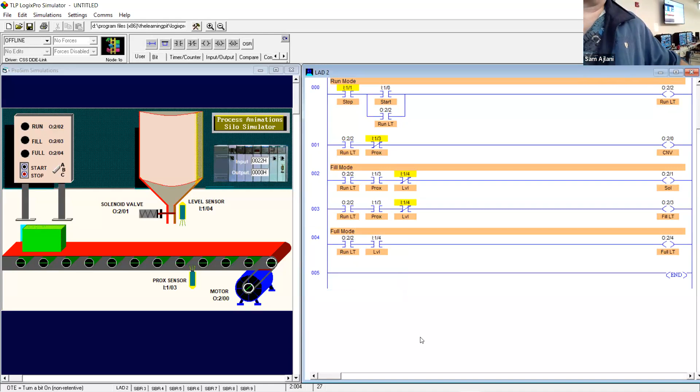And you're saying, well, Sam, this is kind of redundant. I mean, why would you even do that? They can see it's full. Okay, yeah, all right. The mode is there not for the lights and all that. The mode is there to control the process. This is a process. We're in run mode right now. If I hit stop, nothing works. Nothing's going to move. Nothing's going to happen until I hit start. The run light controls the entire process. I have to be in run mode before I can do a full mode or anything else, right?

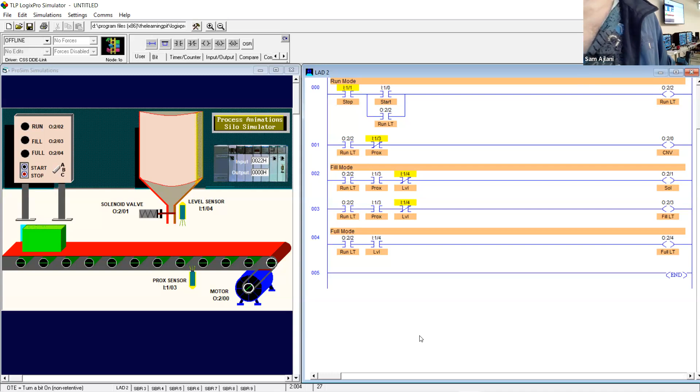So now I'm full. Now what do I do? You want to go back to run. I want to restart my conveyor, right? So I got to go back to the run mode and start playing on that one. So how am I going to do this? Because right now my prox switch is locked out. So what am I going to have to do? Reset. Well, I can, but this is already out because the box is sitting on it. I can't change that. So how do I get around that? When I'm full, I want to move off of that, right? Yep. How am I going to get around that? So what would I use?

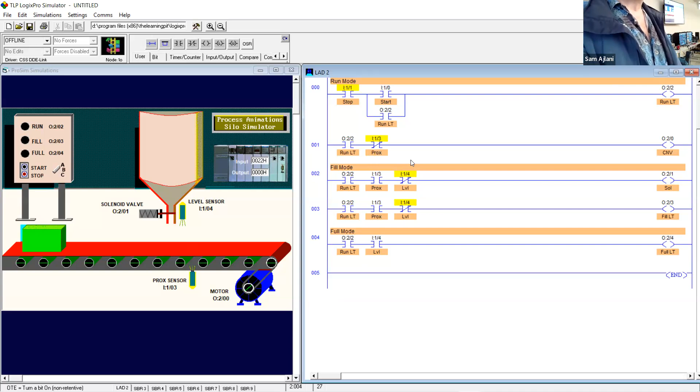You're full. What'd you say? Somebody got it. No. Thinking out loud. Yeah, go ahead. No, because it's wrong. All right, so, it may not be. It may not be. You said something that sounded right to me.

So we're full, right? Yeah, so how do we get around that blocked prox sensor? Got to get around it, right? So loop, yeah, across the input, across that input. There we go. Yeah, I see what you're doing. With what now? Our run light. Not run. We're already in run. It would never shut off. We have the run light there. Oh, okay.

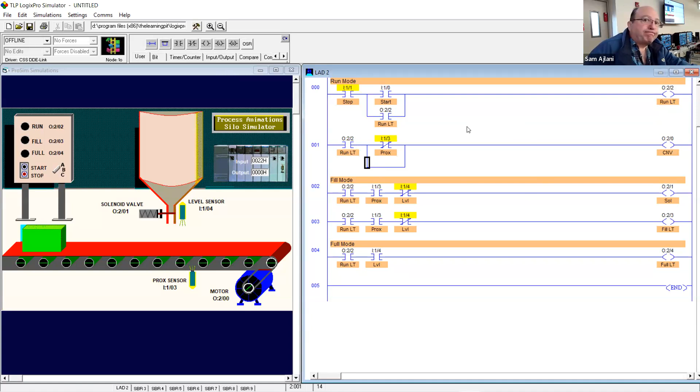Our sensor. Wait a minute. Which one? That's the level. Okay. Everybody agree with that? Yeah, that'll work. Okay. Everybody thinks that's going to work? Well, maybe not. Let's see. Our level sensor now needs to... Yes, that is going to work. All right. Let's put it in and see. Is it? Oh, you're right. No, it's not.

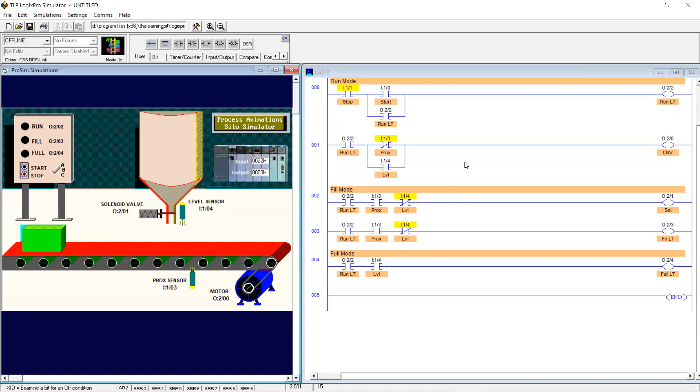That's why you're setting this up. We got to try this stuff. Okay, this is what your students would do. Yeah, this is what you do. So I agree. This is what I'd be doing. So there we go. You got that piece. So what do you think, this is going to start off and go back running, right? You're about to hit a point where you're going to have to figure out the trick to this one. Okay, so let's try this and see how this works.

So what's going to happen is when I hit start, the run light's going to come on. This conveyor is going to stop here, fill up, and then move off, right? Kind of what we're looking for, right? Oh, so we got to shut the solenoid valve back. What happened? Yeah, we kept flowing. So we also have to address our solenoid output. Oh, we got to turn it off. We just dripped everywhere. We did move it along. Quick, turn it off. So it messed up, didn't it? Yeah, so okay, this is nice.

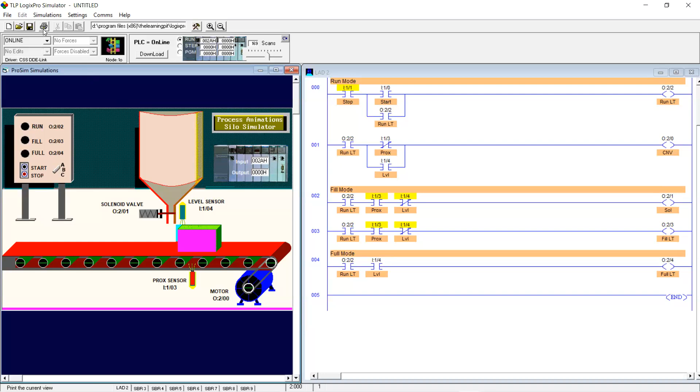See, that's exactly what the students need to see. Fantastic. If they're gonna do this, they got to understand why they're having to do this. And it's like you said, this is good for their process. It's good for me to think about. Well, and if they mark their rungs and label their rungs, they know between which rungs the problem is. So they're not looking at the whole doggone program. They're just going down to that area where that's happening and trying to figure out what's going on.

Yeah, I like the consequence there too, where it shut the plant down. Yeah, absolutely, we got to close the valve. If you notice in the door, it'll do the same thing, and the motor will catch fire if they don't interlock the motors and stuff or use their switches. That wakes them up a little bit. All right, so now we got to figure out how you close the valve in this. So I want to add that. That's absolutely right. So we have how many inputs? We have 12. Got plenty to work with there.

So think about it. Let me get back online here. We're coming and we're rolling down here and we stop. I've got to clear this prox sensor before I can go back to normal. If I'm halfway between this and this, it stops and this valve opens and starts spilling product everywhere. This is real world. They never line anything up in a plant. So how am I going to make that work? I got to get it past this point here. Well, if I use the level sensor, as soon as it goes off, it's off, and I'm still on this, so that's not going to work.

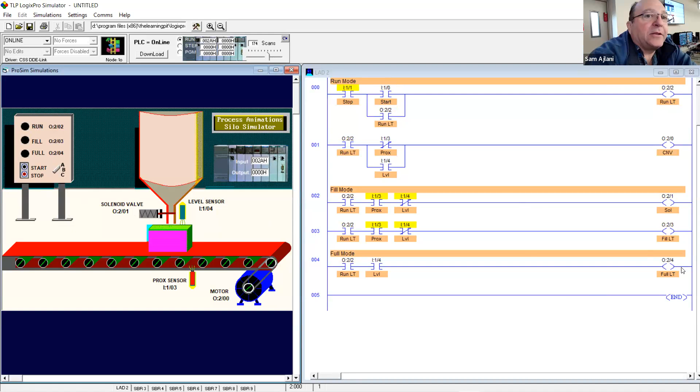So how can I get past this? We got to link the level sensor's results to that. We already have. We got it right here. We have 12 inputs, remember. Okay, so I gotta use another one. What else? So right now, when I'm all the way to the top here, what am I? You're full. Right. So we're gonna use the full output to trigger. Oh, the full light. Good. Of course, what we got to do, just like anything else, is got to lock it on. Yeah.

Now, you said, Sam, I can get these videos, because that's what I need to do, is get through it and watch and think and see. So we have access to these videos you produce? Yeah, you mean the ones I do in class? Yeah, what we're doing these past few. Teresa's recording them. They're out there on the FLATE website. They got that professional development area where you can go in and look at these. Ernie keeps all of it from everything we've ever done.

I go back and watch some of Ron's old stuff. He had some cool stuff going on. I kind of don't take advantage of it. I need to. Yeah, that's why Ernie lets us record for future. If anybody wants to go through this basic part, perfect. Then you guys are going to do the rest of the exercises and see if you can figure it out. When we come back in December, we'll talk a little more about it and then move forward from there. Okay.

All right. So right now you've got the full light on. That'll probably get us past this point, but it's going to be on for how long? Forever. You're going to be bypassing, right? Because it's always on. So when do we have to cut it off? So we want the full light on as long as what's on? Our conveyor. Now, you want the full light on until we do what? Well, when we're full, the full light comes on, which moves the conveyor. You want to get past what? The prox, the input sensor. Right. So as long as that prox sensor is engaged.

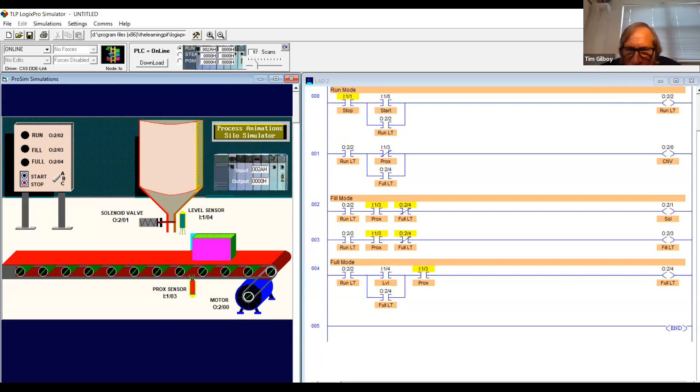Okay, this is on, this is off. Nothing spilling. You can see right here, my prox is on. My level sensor is not on. I'm in between. Nothing spilling because I've got the full light controlling it. Got it. Wow, that's clever. Not clever, it's just logic. Don't confuse intelligence with proper use of logic. You're right. That's logic.

Now, I'm going to tell you, your students are going to do it 3 or 4 different ways and make it work. As long as it works, it's good. So I test these things, and every one that I got, I test exactly like this. I make sure I stop it between so it's not spilling anywhere. If it spills at any point in time, it's no good. I give them a 0 and say, go try it again. You're still spilling product. I make them work on it until they get it.

Once they get this concept down, this can be used anywhere. Outputs can become inputs. That's why your B3s can also become an input up top. Remember on the last one? Those were outputs. We made them inputs. So your lights can be used. So I don't have to wire another doggone relay, and I could just use the output as an input. How many lights do you know have contacts on them?